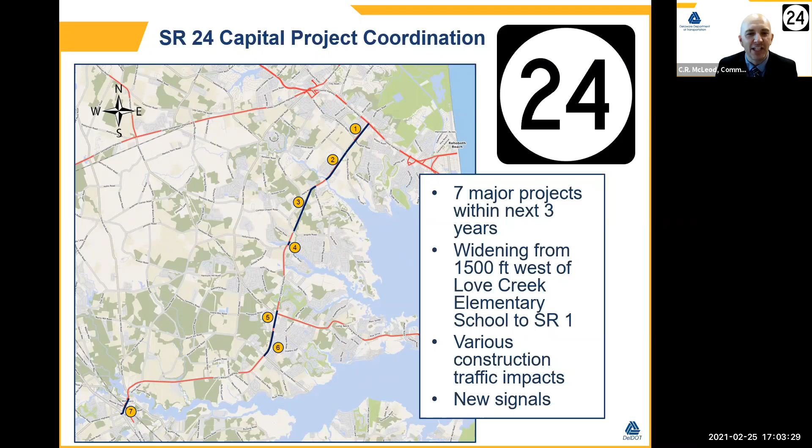Our first presenter this evening will be John Gaines, who is overseeing our first large project underway on Route 24 at the Mulberry Knoll intersection. So with that, I'll turn it over to John.

All right, so my name is Mark. I am not John, and John was having technical difficulties, and it was working 5 minutes ago. No audio from John. I'm going to call an audible and try to get through John's presentation. Thanks, CR. If John gets his audio fixed, he will jump in. But my name is Mark Luszcz. I am a deputy director here at DelDOT, and I'm going to try to get us through these first couple projects. So sorry about that, folks, as we hit our first technical difficulty.

So I'm going to start by talking about the Mulberry Knoll to Route 1 project on Route 24. If you are living in this area, you are well aware that this project is under construction. I'll let you know that we are hoping to complete the project in early 2022, so about a year's time left on that project.

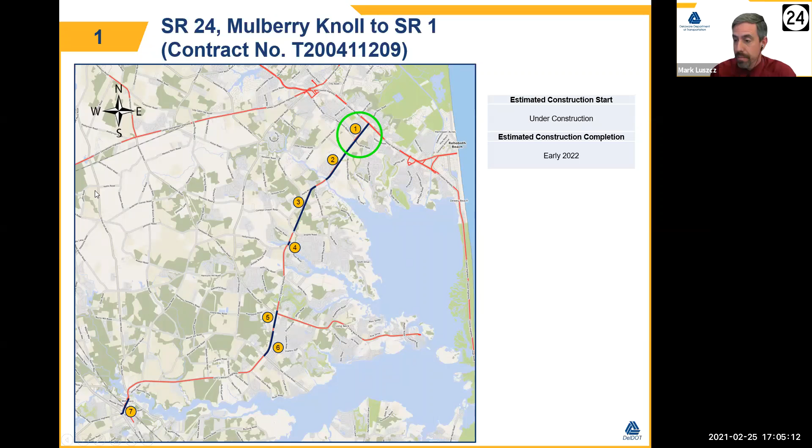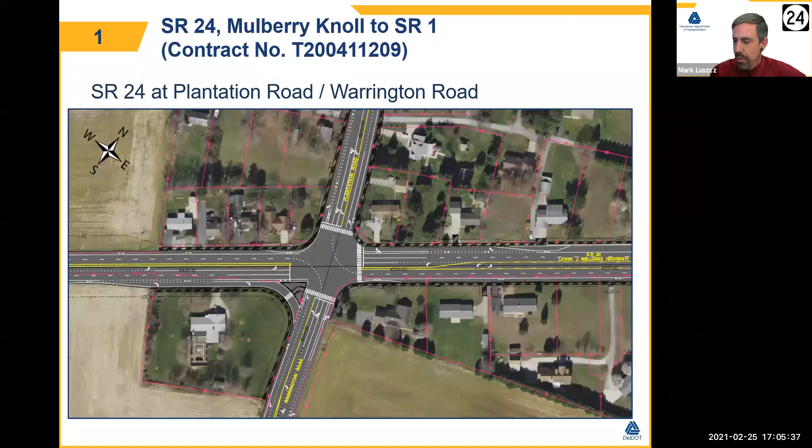There we go. So what you're seeing here is an artist rendering of the intersection of Plantation Road, Warrington Road, and Route 24. This project is expanding Route 24 to 2 lanes in each direction with extra auxiliary lanes, turn lanes, and bicycle lanes and sidewalks throughout that corridor. And good, the paging forward is working better now. So this project is addressing safety and operational improvements. We'll have a center turn lane and upgrades to the side streets at all the key intersections, along with multimodal improvements, including crosswalks, sidewalks, paths, pedestrian signals, and things like that.

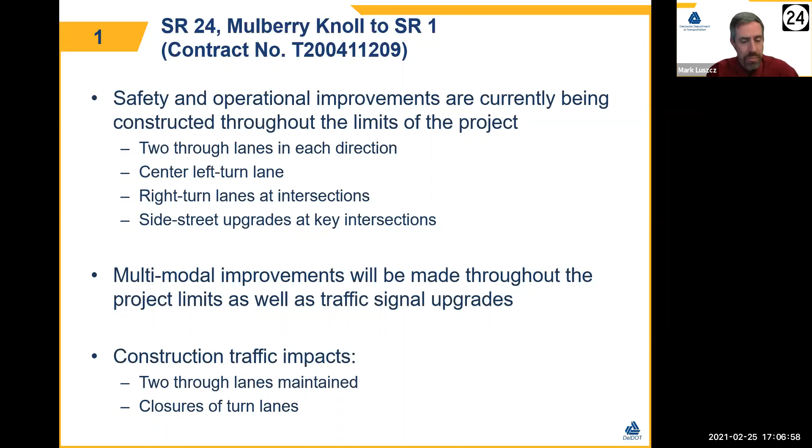As you know, various lanes are closed during construction. We are happy to say that the right turn lane from 24 heading south on Warrington Road has reopened. We know that was causing some added congestion, as you would always expect in a construction project, so we apologize for that. Moving this project along, we are maintaining at least 1 through lane in each direction during the duration of the project, and there may be intermittent closures at nighttime or for construction deliveries. So again, that project is deep into construction, and at this point our schedule is that it should be complete in early 2022.

So just giving... looks like John is not... Yeah, I'm back up, he's Mark. You got it all right. Yeah, good, I don't know what happened there. Somehow it switched from computer to phone and just completely cut me out. All right, so my apologies, folks.

All right, so I'll let... anything you want to add on the first project? No, I think, well, I missed most of what you were saying. So I think we're good on the first one. Let's move on to the second project. Okay, Wilmer Nauman will now be presenting the next two projects.

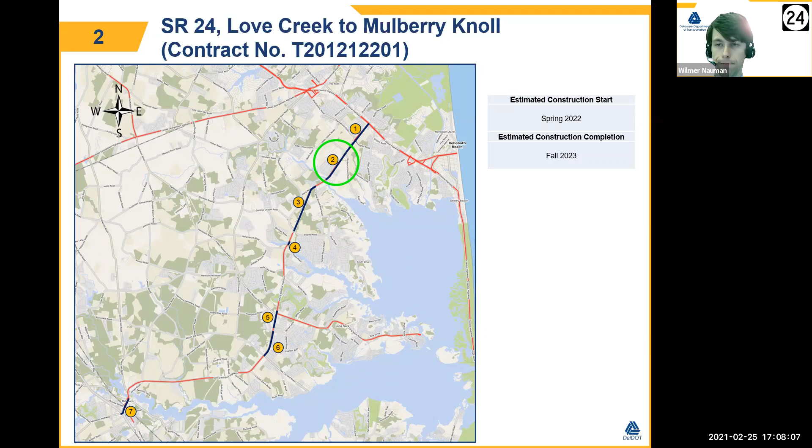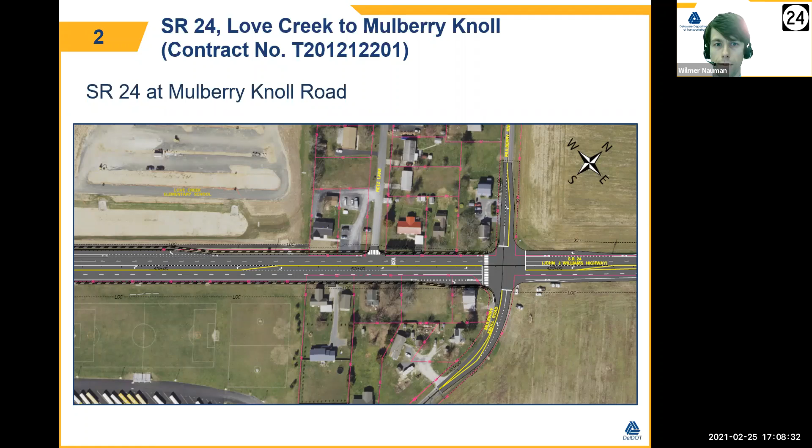Also, as part of our project, we'll be providing or extending left and right turn lanes at both of those intersections. Now west of Aventers Way, SR24 will be one lane in each direction, but we will be providing a shared left turn lane from Aventers Way to our project limits at Love Creek.

Now we'll also be making multimodal improvements to the corridor, which includes new bus stops, bike lanes, sidewalks, and pedestrian crossings at both the intersections of Love Creek Elementary School Drive and Mulberry Knoll. And of course, during construction, we'll be trying to maintain one through lane in both directions on SR24, with closures of turn lanes as needed to limit the disruption of traffic along the corridor.

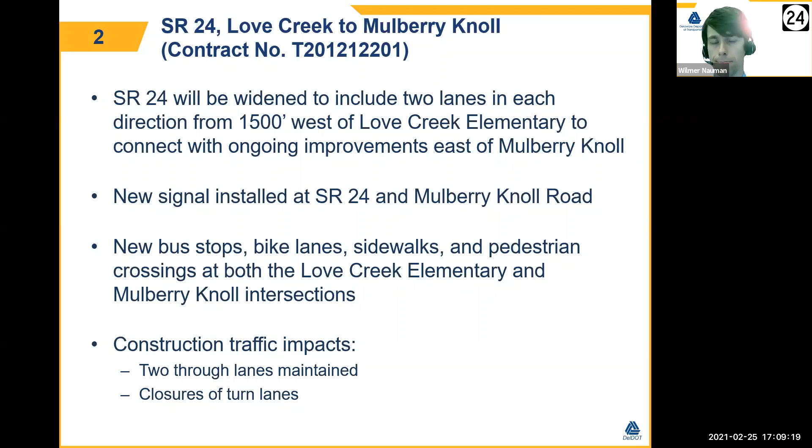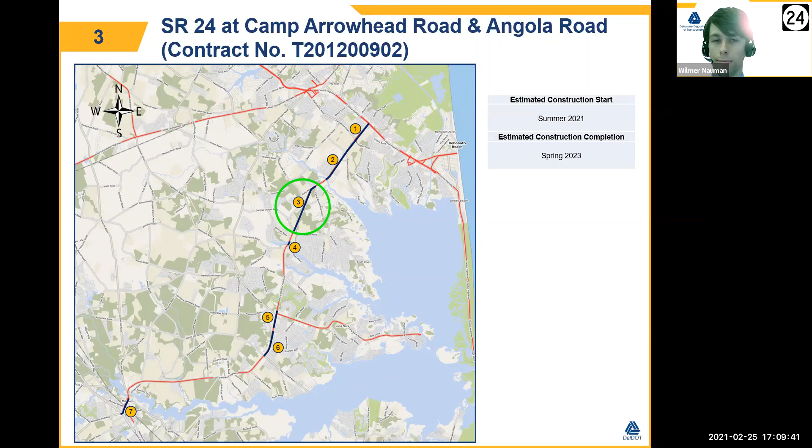Here we have another visualization of the intersection of Camp Arrowhead Road and SR24. As you see, we'll be adding or extending right turn lanes on all legs of the intersection. And within our project limits, we'll be providing 5-foot shoulders on Camp Arrowhead Road, which includes bike lanes.

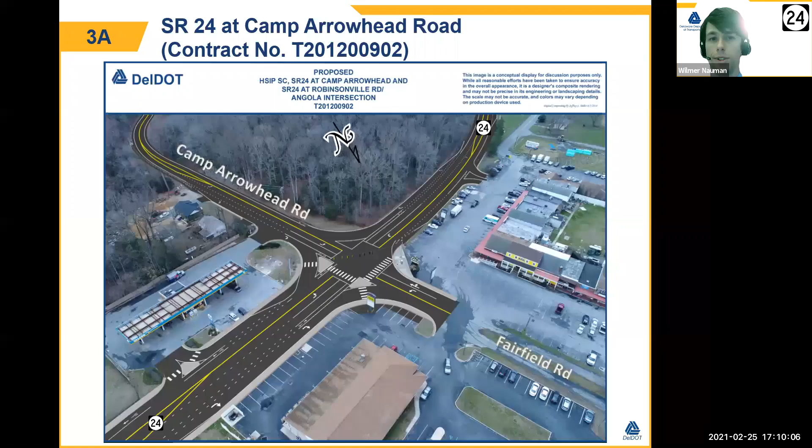We'll also be making multimodal improvements to this intersection as well, which includes two new bus stops, sidewalks, bike lanes, and pedestrian crossings along SR24. During construction, we'll be maintaining lanes in both directions on SR24, with limited lane closures to the nighttime to avoid disruption of traffic.

I did also see in the Q&A, people were concerned about both Angola Road and Camp Arrowhead Road being detoured at the same time. Our intent is to construct each intersection separately, so there would be no detour on both those roads at the same time. Either Angola Road or Camp Arrowhead Road will be open at the same time.

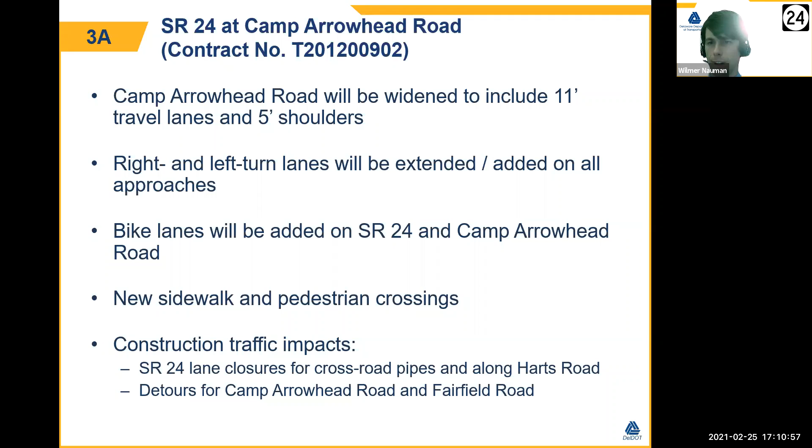And as I mentioned before, detours will be provided for Camp Arrowhead Road and Fairfield Road at alternate times to expedite construction time. Second half of this project is the intersection of SR24 and Angola Road.

Again, we have another visualization here showing what we'll be doing. We'll be realigning Robinsonville Road to SR24 to eliminate the skew at the intersection. And again, we'll be adding or extending left and right turn lanes on each leg approaching the intersection. And within our project limits, we'll be providing 5-foot shoulders and bike lanes on both Angola Road and Robinsonville Road.

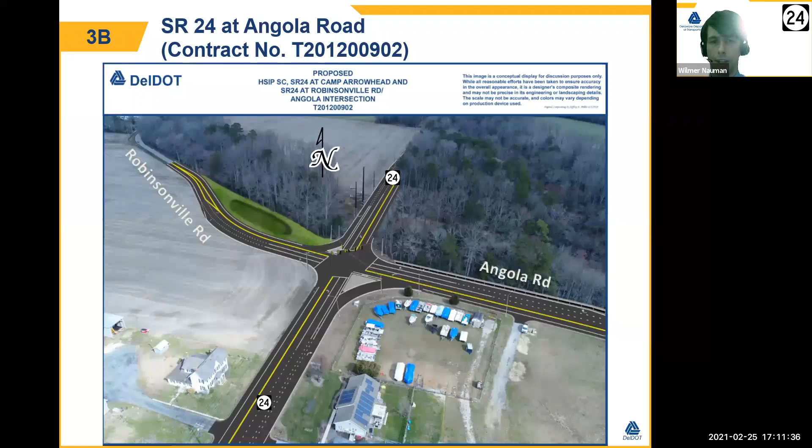Similar to Camp Arrowhead Road, we'll be making multimodal improvements. We'll be adding a new bus stop, bike lanes, and pedestrian crossings through the intersection. And similar to Camp Arrowhead Road, we'll be maintaining a travel lane each direction on SR24 during construction.

And detours will be provided for Angola Road and Robinsonville Road at alternating times to expedite construction. That's all I have for you guys. Thank you so much for your time. And if you have any questions, please put them in the Q&A box.

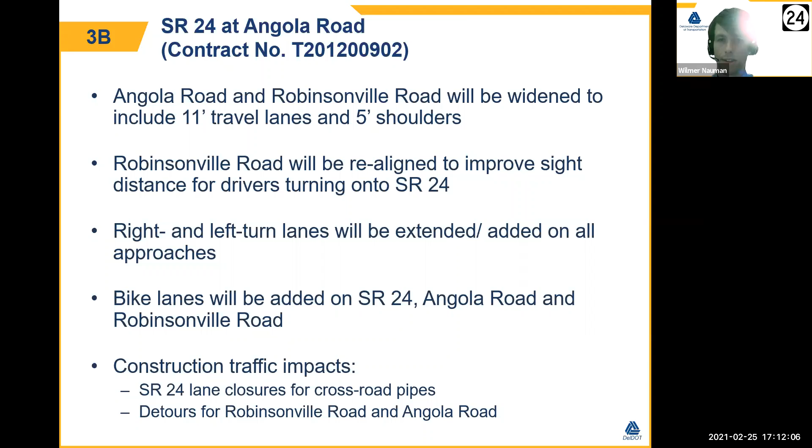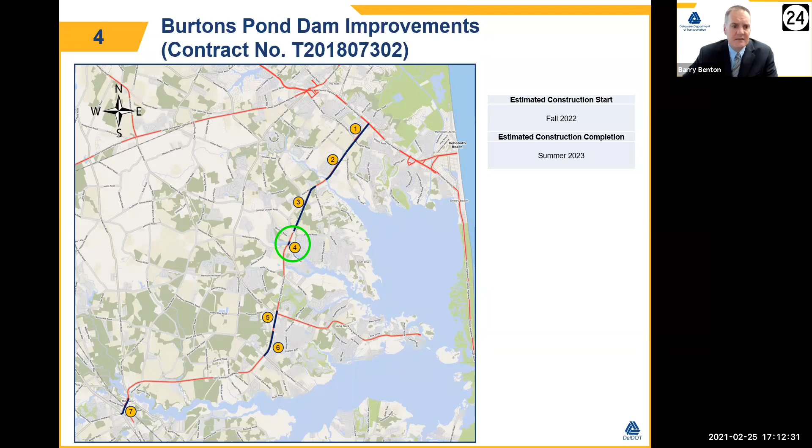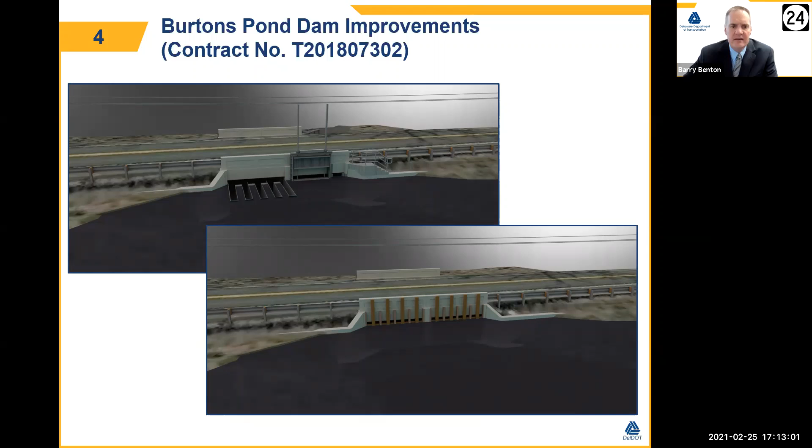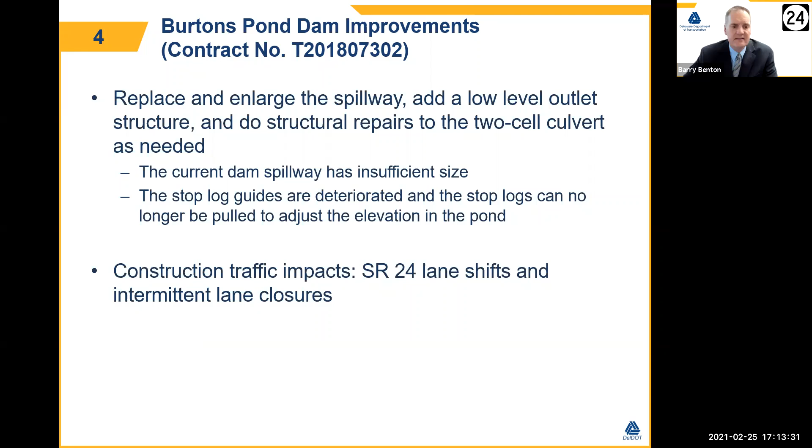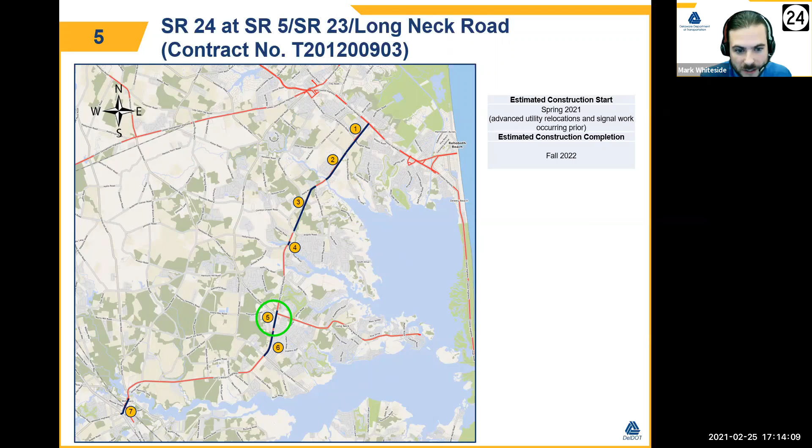I'm here today to talk about a few more safety improvement projects that will soon be in construction as we head further south along SR 24. The first project is the SR 24 Long Neck Road intersection. We anticipate roadway construction to begin this spring with completion in fall of next year. Utility relocations and signal work are scheduled to be done in advance of the roadway project, which we anticipate will reduce the overall construction duration. Improvements include extending left turn lanes to allow for more vehicle storage.

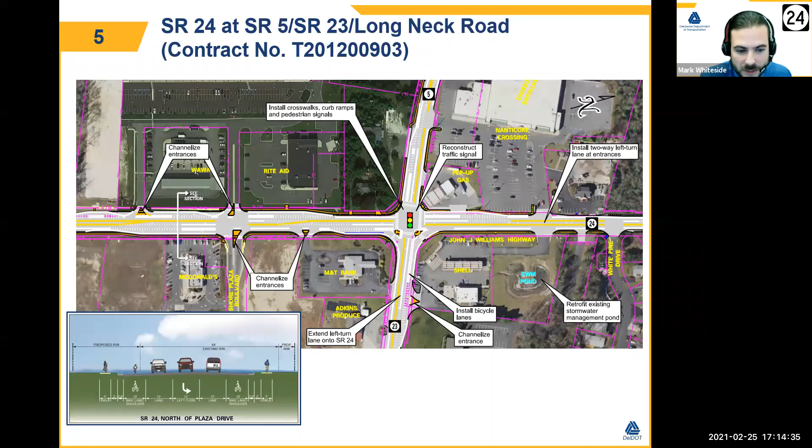The project also includes multimodal improvements such as dedicated bike lanes, ADA compliant sidewalks, and bus stops. Also, as a safety project, we will use access management strategies by proposing channelized islands at several business entrances within the project limits.

Regarding traffic impacts during construction, the phasing will mostly consist of temporary lane shifts, allowed to occur during daytime hours. We need to monitor traffic congestion in this area, which means the majority of construction resulting in more significant impacts to the traveling public, such as turn lane closures or impacts to a business entrance, will most likely be done at night. I'd like to emphasize that night work is likely to happen on this project.

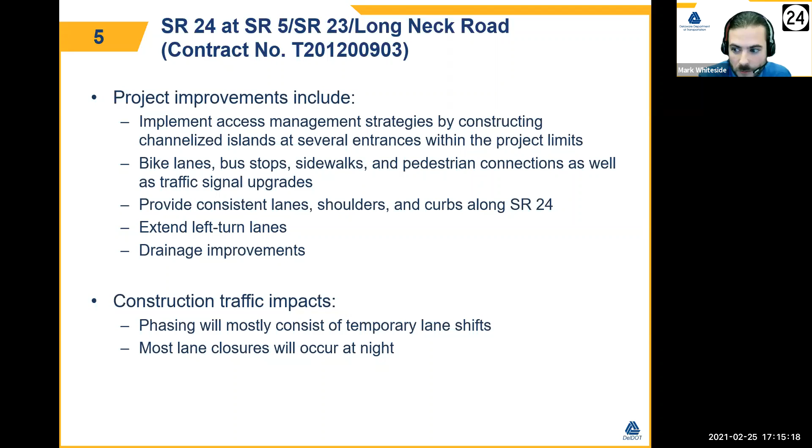The next project is another SR 24 safety improvement, located just south of Long Neck Road, involving the intersections at Mount Joy Road and Bay Farm Road. We anticipate construction to begin this upcoming summer with completion in fall of 2022. This project's right-of-way acquisition is complete and utility relocations have begun. Having utility relocations finished prior to the roadway contractor being on site should help reduce the overall construction duration at this location.

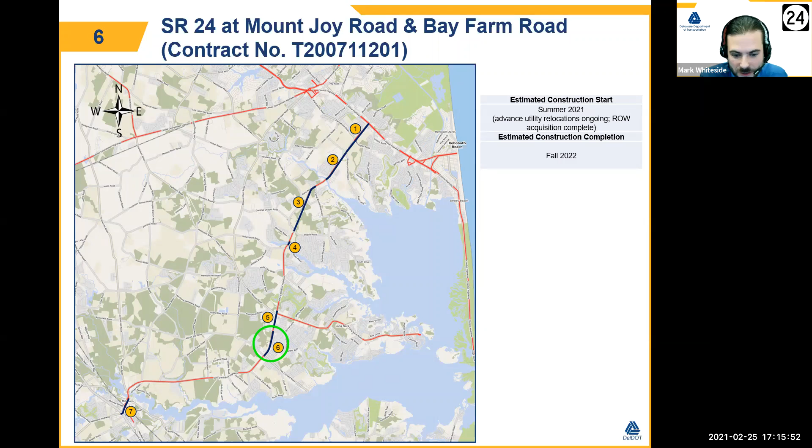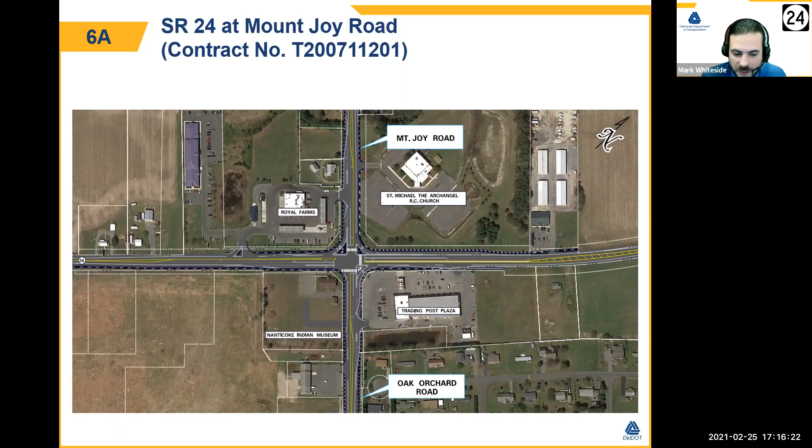The display shown covers the improvements at the SR24 and Mount Joy intersection, very similar to the previous project presented. Improvements include extending turn lanes on all approaches, as well as adding a dedicated left turn lane on Mount Joy Road and Oak Orchard Road. Multimodal improvements such as bike lanes, ADA compliant sidewalks, and bus stops will also be included, hopefully encouraging alternative modes of transportation and helping local residents move safely through the intersection.

Due to safety concerns, DelDOT is proposing to construct a channelized island at the Royal Farms entrance, located directly along SR24. Looking at traffic impacts during construction at this intersection, phasing will mostly involve temporary lane shifts during the day. However, there is potential for short-term detours when the contractor needs to work in the middle of the intersection, as well as closures of existing turn lanes. For most of these closures, the contractor must follow the work hour restrictions noted in the contract documents, meaning most will occur at night.

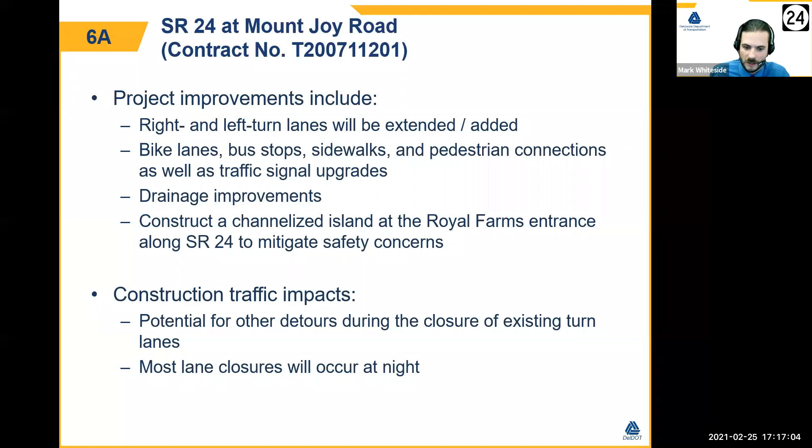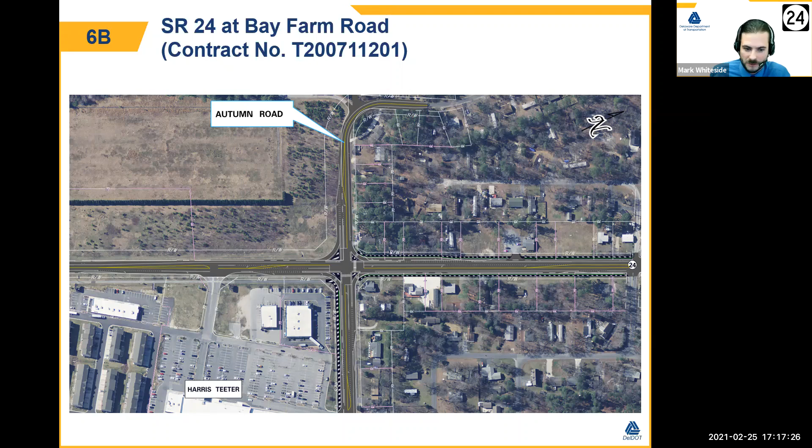The traffic impacts during construction for this intersection will include an approximate 30-day detour for the full-time closure of Autumn Road. There is also potential for other short-term detours if an existing turn lane needs to be closed. Again, very similar to the Mount Joy Road intersection, if a turn lane closure needs to happen, it will most likely be during the night hours.

So that basically sums up these intersections. And with that, I'll turn it over to Mark Luszcz to discuss more projects along SR24.

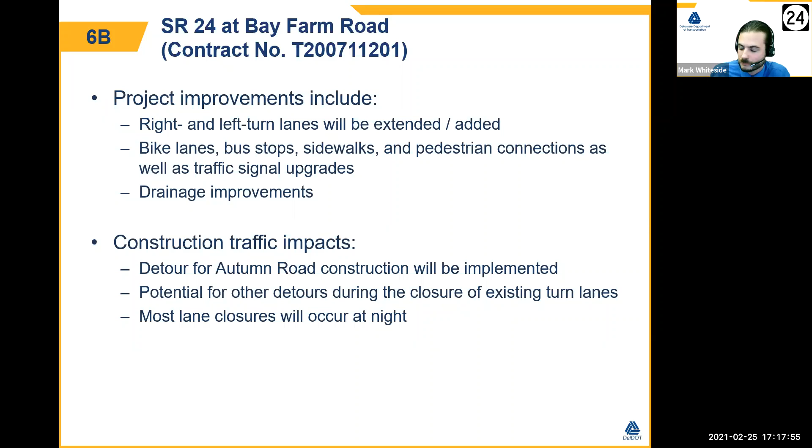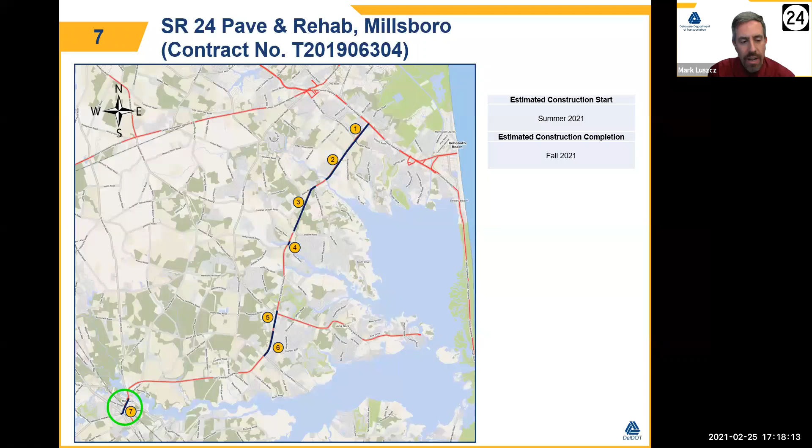Thanks, Mark. I'm going to take us through the remainder of our prepared presentation, the home stretch here. The next one is a pavement and rehabilitation project occurring basically within the town limits of Millsboro. It extends from Route 113 through the town limits, as well as work on State Street from Route 24 to the Little League just to the west of Route 24.

This project is mainly a replace-in-kind pavement and rehabilitation project. It's part of our asset management, pavement management program. Most of the mill and overlay and most of the pavement and striping will just be replaced in kind. We are making some operational upgrades, as shown on the screen here.

We'll also be making some minor modifications to the striping around the State Street intersection to hopefully improve the way traffic and trucks can turn through that intersection. And of course, if you're a resident of this area, you know we had a rail project related to this paving project that was completed last year, so that job is complete.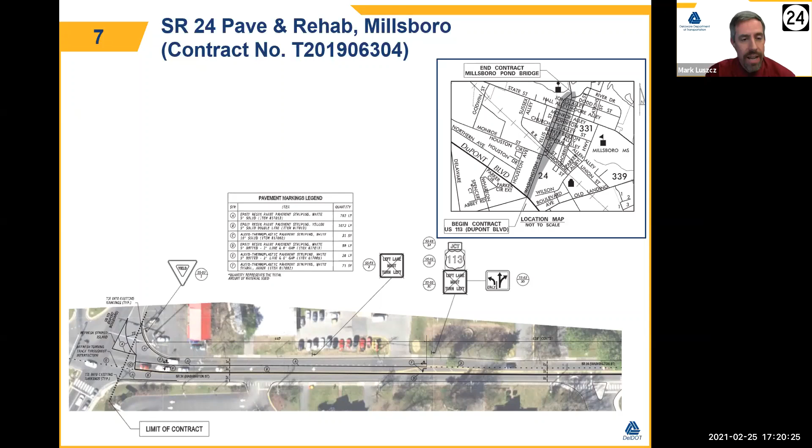For this work, the work on Route 24 will be night work, to minimize impacts to traffic during the day. The work on State Street is planned to be day work. This project is getting ready to go out to bid now, so we plan to have a contractor on board by early summer, hope to get them started by the end of summer, and the project should be completed, hopefully, by the end of the year, if all goes according to plan.

So those were the seven main projects on Route 24 from 113 to Route 1 that we really wanted to cover in our presentation tonight. I am going to spend a little time now on some other projects in the area. We're not going to get into a whole lot of detail on these.

We'll have separate public involvement on most of these, but one small one is down at that same intersection of 113 and 24. Going in the eastbound direction on eastbound 24 approaching 113, we have a design nearly complete to add a separate right turn lane there right in front of Wawa. We are hopefully at the very end of wrapping up our right-of-way negotiations on that job.

As soon as that's done, we'll be able to transfer that to our construction section. If the planets align, which we are hoping for, we may have that improvement implemented before summer 2021. So that is our hope for that small turn lane project in front of the Wawa in Millsboro.

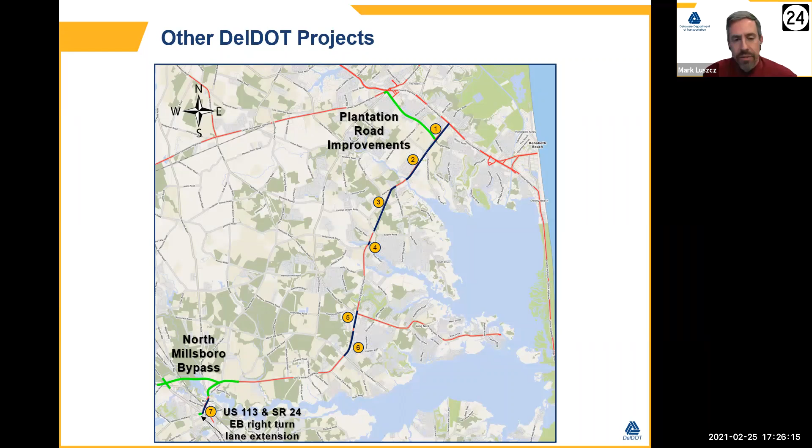So, as we wrap up, the last thing I want to say is we've given you a lot of schedules tonight. Let me put a caveat on every schedule and date we've expressed: those are all subject to change. That is the best information we have at this point in time.

The transportation process and project delivery process is complicated and highly regulated, with a lot of different parts and pieces involved in delivering projects. There are a multitude of things that could delay projects, whether that's an unforeseen field condition we come upon once we get into construction, or a delay in a utility company's plan to move utility lines on a certain schedule.

Our right-of-way acquisition process can take longer than we'd like sometimes. Our environmental approval process is highly regulated, how our projects are permitted and approved, and those can delay us as well. So all the schedules we gave you tonight, we're hopeful we can hit, but we may not always hit them.